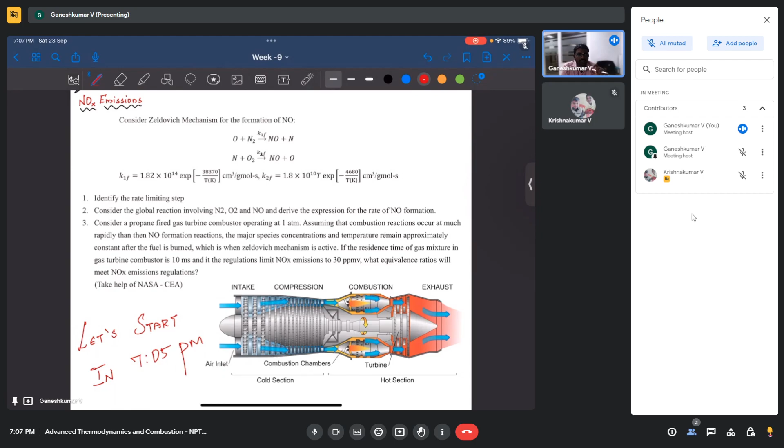Instead, we are going to focus on something which has a practical application using chemical kinetics. So what I have today is, I am going to talk about something called NOx emissions, which is very much crucial if you are operating a gas turbine engine, or in the sense, rocket engines or aircraft engines.

Because aircraft fly at high altitudes, they should not emit certain gases which are harmful to the environment, and if they do emit them, it leads to global warming. So basically, if it releases greenhouse gases, it will lead to global warming. The main gases which constitute global warming at that altitude include carbon dioxide, carbon monoxide, and NOx, nitrogen oxides. In addition, there is ozone also, which contributes to global warming.

But these are the main gases which contribute to global warming, and there are certain limitations, certain regulations set by the aircraft authority. They say that if I'm using such engines, then my emissions should be only a certain amount — above that, it is not allowed. So there are certain allowable emission norms which you should follow in order to operate such aircraft engines.

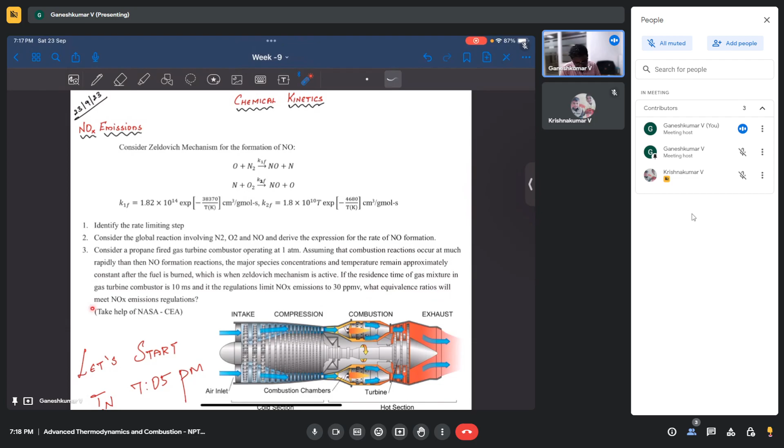If the residence time of the gas mixture in the gas turbine is 10 milliseconds, and if the regulation limits NOx emissions to be 30 ppm by volume, which means parts per million by volume, what equivalence ratio will meet the NOx emission regulations?

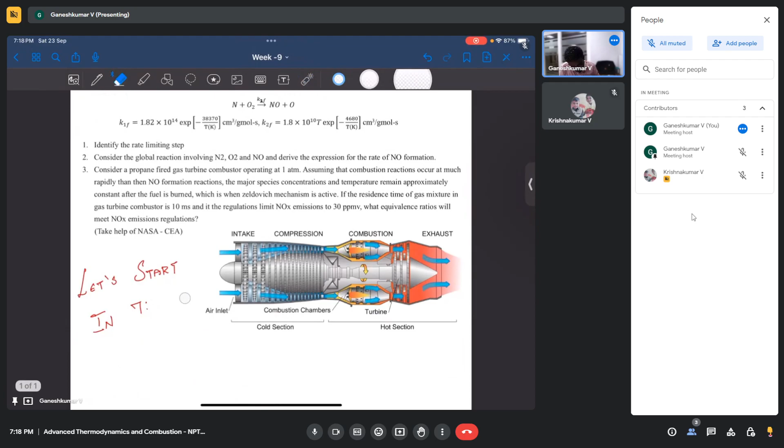So what I'm telling is, you have a gas turbine here.

Here we have a gas turbine and air is coming in. It goes through a series of compression in the compressor, then combustion in the combustor, then it expands in the turbine, and finally goes out through the nozzle. So the time it requires to go through all these things is just 10 milliseconds.

So residence time of gas mixture in the gas turbine combustor - just the combustor. Let's say this is T1 and the time it goes out is T2. This T2 minus T1 is actually equal to 10 milliseconds. So this is the amount of time the gas mixture will stay inside the combustor, after which it goes out of the combustor.

So that is one of the, it's not an assumption, it's like one of the crude calculations you can make, because you will be taking in air at very high speed, right? So you will probably run your engine at Mach 0.8 or 0.9.

So if the aircraft will usually move at Mach 0.8, which is around 280 meters per second or something - 280, or let's say 250 meters per second.

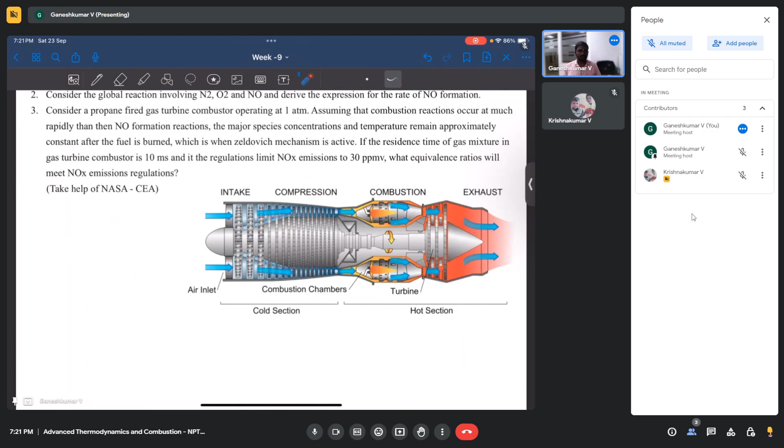The actual fuel air ratio divided by the stoichiometric fuel air ratio - that is the equivalence ratio. With which equivalence ratio you have to run your engine in order to meet this NOx emission is what we are going to find.

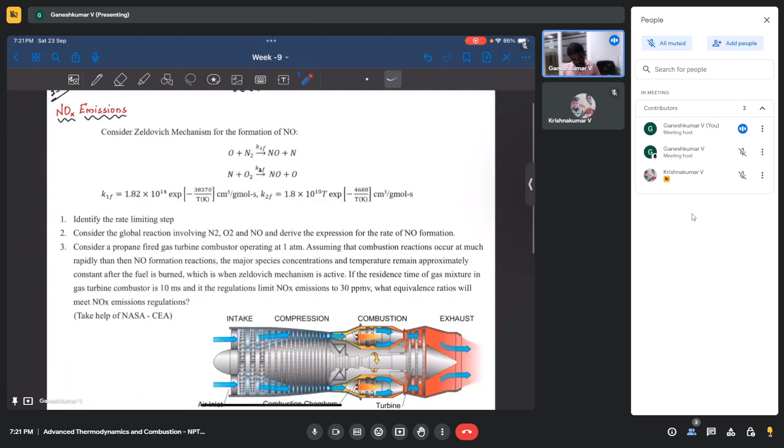Okay, so provided that the problem statement is clear, first let's try to identify the rate limiting step, because that is important and all your calculation is going to depend only on that rate limiting step. Rate limiting step, in the sense, is the main step which is going to take much of the time. If this step doesn't happen, the other subsequent steps will not happen.

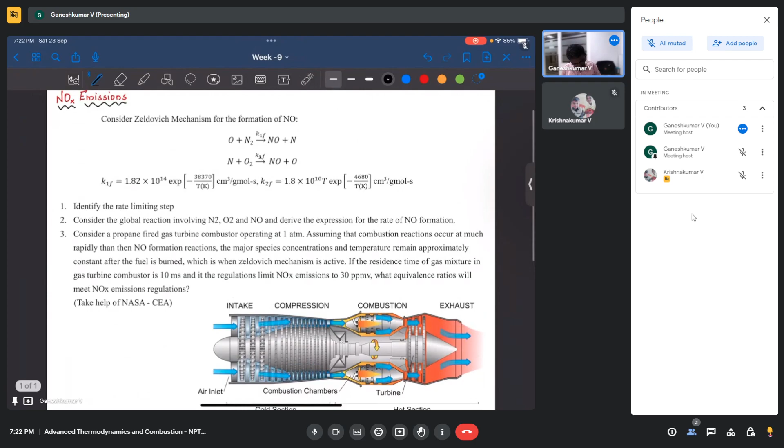The other subsequent steps are very fast, and you can assume that once something is formed, it will automatically get consumed. So that kind of step is the other step. The step which takes longer time, the step which is more important, is what we call the rate limiting step. So now we have two steps - let's try to find that out. Let me write it down separately here.

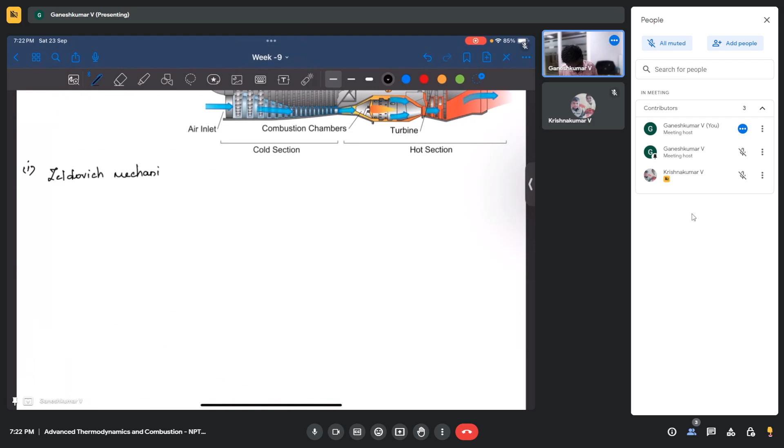So first we have the Zeldovich mechanism, and we have...

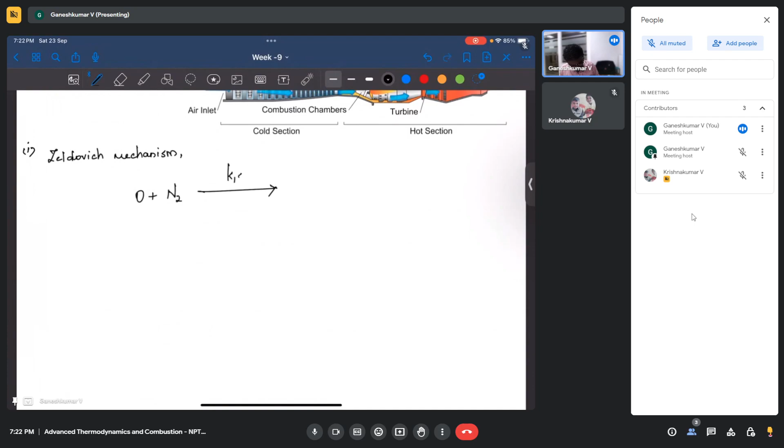K1F, NO plus N - that's the first step. The second step is, I guess, N plus O2, K2F, NO plus O. So this is the first step, and this is the second step.

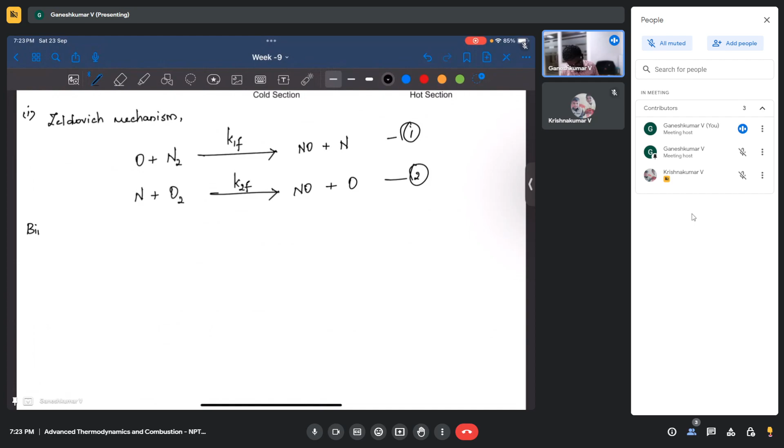So now we need to find which one is rate limiting. To find that out, we need to understand what is the time required for NO to form through step 1, and what is the time required for NO to form through step 2. We can get an easy estimate by finding the characteristic time scales. So all these are bimolecular reactions, and we already know what is the characteristic time scale of a bimolecular reaction.

So we know that tau chemical, for a bimolecular reaction, is going to be ln of E plus 1 minus E, in A, concentration of A by concentration of B, whole divided by K of that reaction, for a bimolecular reaction, times B of 0 minus A of 0.

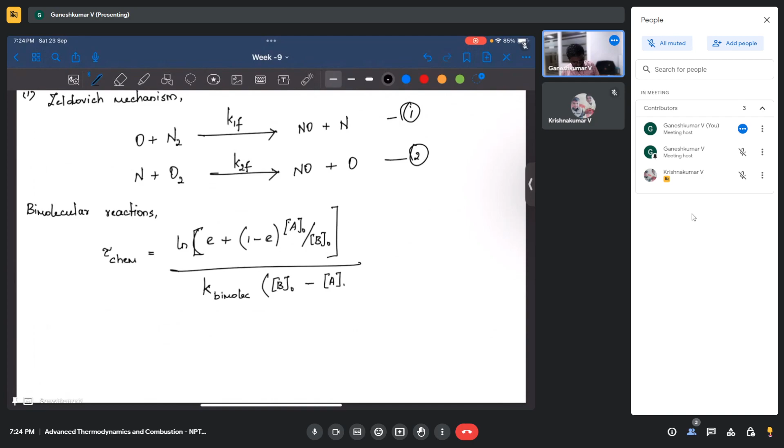Now we also know that if concentration of B is very high compared to A. So this is basically what I'm trying to say: A plus B gives C plus D.

For this reaction, what is the chemical time scale is what we are finding. If the concentration of B is larger compared to A, which is usually the case in our mechanism also - concentration of N2 is only going to form, O2 is going to form, and that is going to react to form NO. So initially we have N2 and O2 as major compounds. In air also, N2 and O2 are the major constituents of the gas mixture, while O and N are very less in concentration.

So we can say that for our case also this is true. If that is the case, this tau chemical reduces to simply 1 divided by K bimolecular.

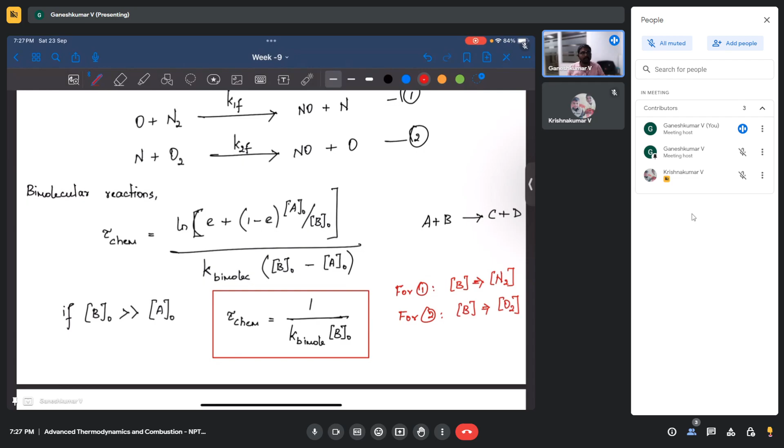So what is the easiest way for NO to form is what we are finding, or what is the toughest way. So let's find for reaction one.

For reaction 1, let's say I denote it as tau C1, which is going to be 1 divided by K1F, the forward reaction, times the concentration of N2. So this is the characteristic time scale for the first reaction.

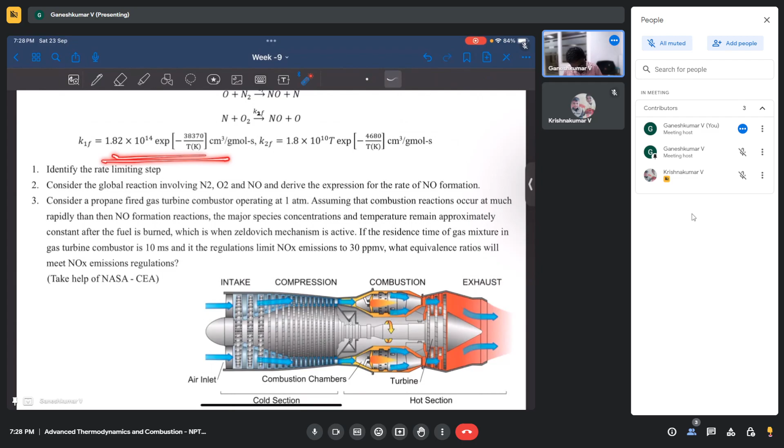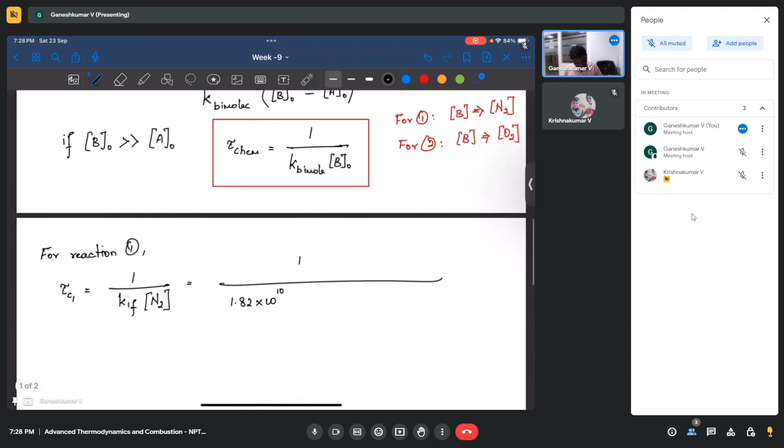And it's also given that K1F is this big expression, so let's substitute that here: 1 divided by 1.82 into 10 power 14 into exponential of minus 38370 by T. So it's going to depend on temperature also, and we have concentration of N2.

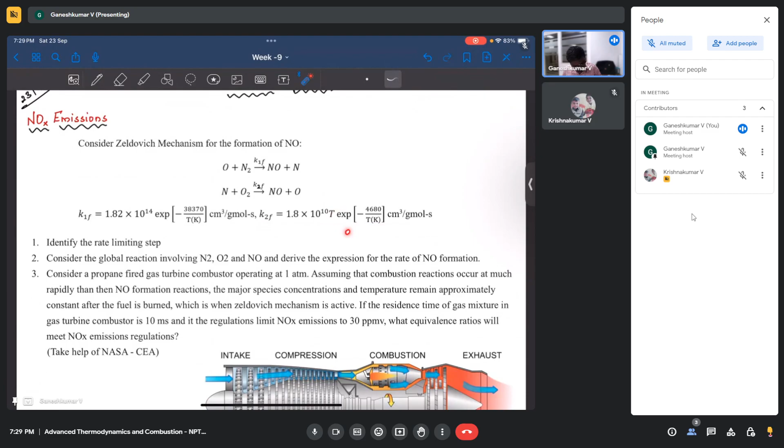Now let's write for reaction 2 also. So tau C2 is going to be 1 divided by K2F times concentration of O2, which you can similarly write as 1.8 into 10 power 10, exponential of minus 4680 by T, times the concentration of O2.

Please remember this is in centimeter cube per gram mole second, centimeter cube per second, which means concentration also you may need to substitute in terms of gram mole.

How do you substitute concentration? It is going to be per unit - gram mole per centimeter cube. So concentration in terms of volume is going to be moles per centimeter cube. So this should be substituted in moles per centimeter cube, please remember that.

You will get 1 divided by second - the time scale is in terms of seconds. So the whole thing will be in terms of seconds.

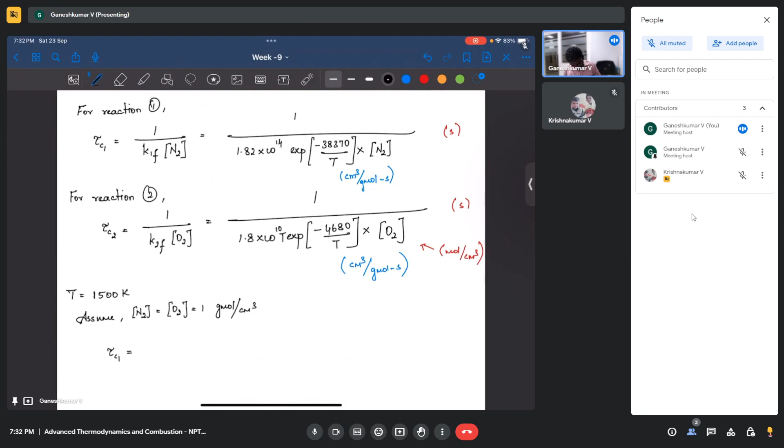Now let's say if I substitute it, let me find out an order of magnitude for tau C1. Let's say if I substitute it in here, calculate it. So I have 1500 Kelvin, so 38370 divided by 1500, exponential minus, 1.82 into 10 power 14, and 1 divided by answer. So tau C1 is coming out to be 7.066 into 10 power minus 4 seconds.

So from here what you can find is, this is for just an arbitrary case, right? So even if N2 and O2 have very large differences, let's say even if N2 is 1 and O2 is 1000, or if N2 is 1000 and O2 is 1, even if that is the case, it is more likely that tau C1 is always going to be greater than tau C2. The reason is by how many orders different in magnitude.

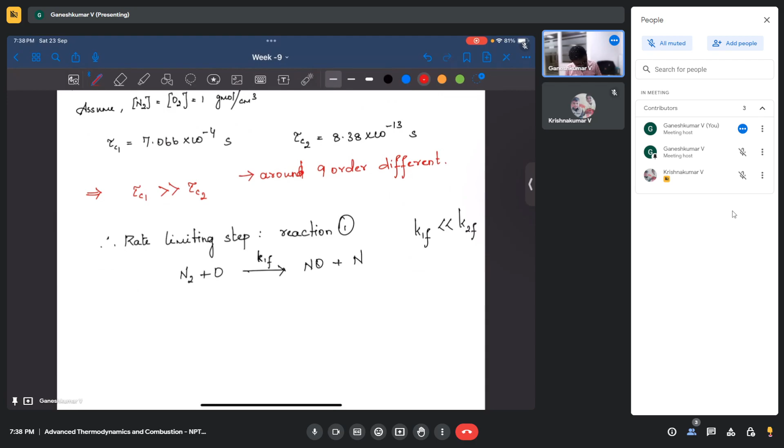Let's look at question 2. What is the next step? You need to consider a global reaction and find the rate of NO formation. Now it's a real challenge. We just found out that this reaction is responsible for NO formation, so this is the main reaction responsible for it. Now we are going to quantify the amount of NO formation. So for that, let's write a global reaction.

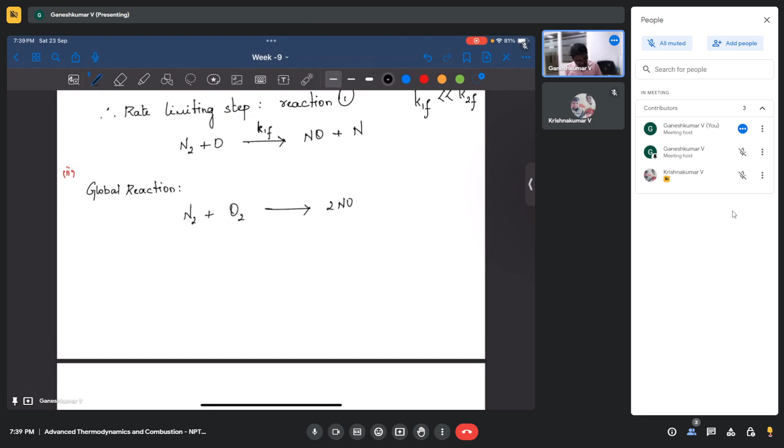I'm sure you must have seen it in the lectures. It's going to be just N2 plus O2. This can be the algebraic sum of those two reactions in the reaction mechanism, and this is going to happen at some rate kg.

Now let's say if I want to find the rate at which NO is formed, which you can write as d by dt of NO concentration, it is nothing but kg times the reactants times the product, and this concentration will have some factor in the power. But that power doesn't actually follow the stoichiometric coefficient. So this is not 1 and 1, because for a global reaction the order is not equivalent to the stoichiometric coefficient, but in a reaction mechanism you can simply write the stoichiometric coefficient.

In a reaction mechanism, meaning in each and every elementary reaction, you can do that, but in a global reaction you should not, because in reality N2 is not going to just collide with O2 and form 2NO directly. That is not going to happen; it happens through a series of elementary reactions. So for elementary reactions, when you write the rate at which each species varies, you can write these stoichiometric coefficients, but in global reactions you should not write that.

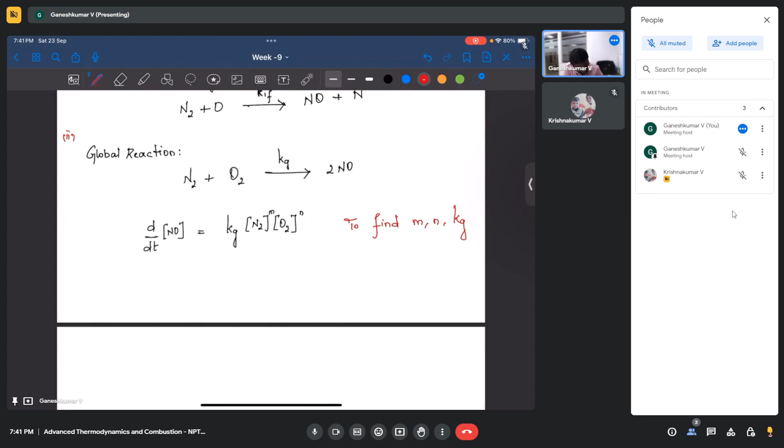Now we need to find m, n, and kg. Once we find these three, we can simply find d by dt of NO. So let me write that down. Now, to find m, n, and kg, how do we do it? That is going to come from our knowledge of the Zeldovich mechanism. Let's try to do that.

So reaction one: what is reaction one? It's going to be O plus N2 gives NO plus N. This is reaction one.

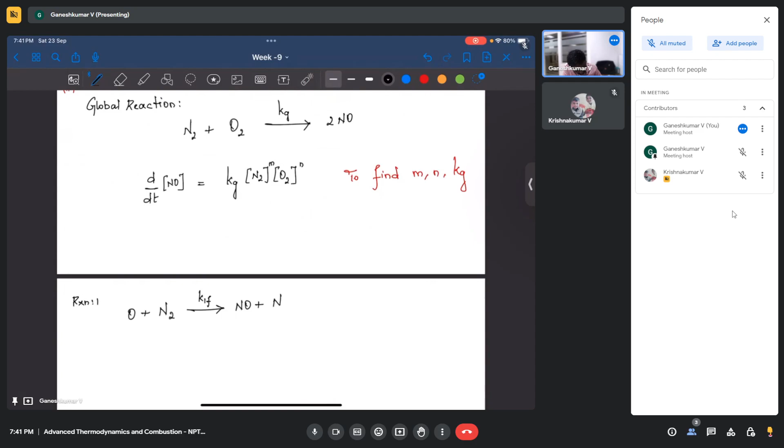So let's say if I write dNO by dt for this, what it's going to depend on is K1F, concentration of N2 to power 1, and concentration of O to power 1. So that is true.

But it's not just reaction 1. NO is formed through reaction 2 also, which is N plus O2 with rate K2, giving NO plus O.

So before we wrote for a global reaction. For this, let's say if I write the formation of NO, we will get K1F times N2 concentration times O concentration, from the first reaction, plus K2F times N concentration times O2 concentration. So this is the contribution from the first reaction, and this is the contribution from the second reaction.

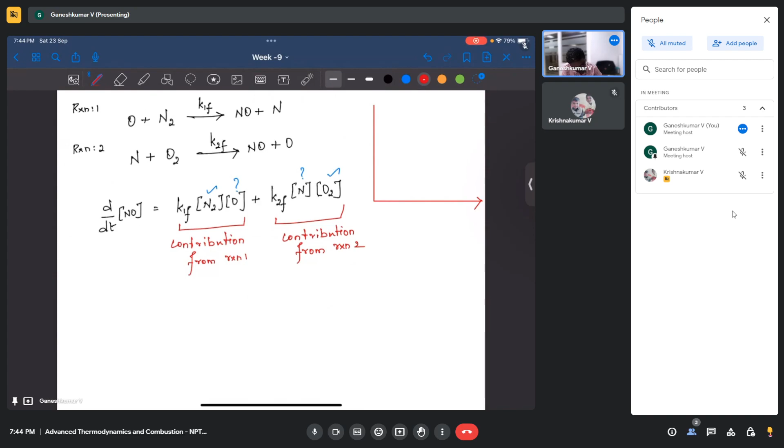Okay, so maybe before doing that, let's intuitively try to understand how the concentration varies with respect to time. So this is time, and this is concentration, concentration of any species. Let me write it down like this.

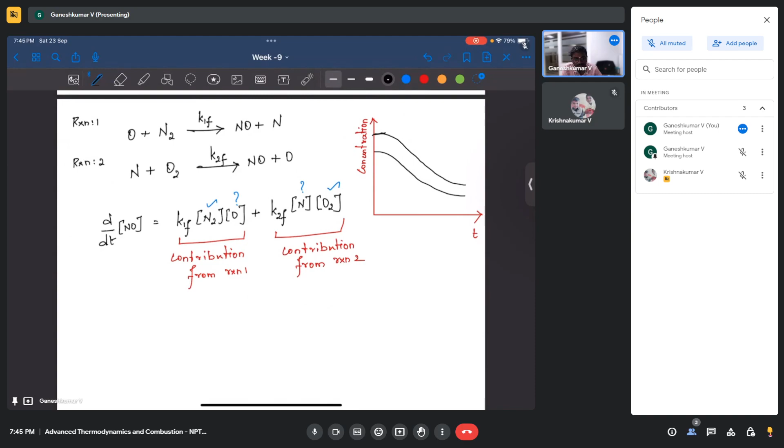Now let's say for N2, initially it will be at a certain concentration, and as time goes, N2 gets consumed and forms NO, so N2 concentration reduces. Similarly O2 is also at some initial level and it also reduces over time. That's fine for NO formation, so this is N2, this is O2.

Now let's draw for NO. Initially it will be zero because it's not present, and as N2 and O2 get consumed, NO goes higher and higher, increasing until it eventually reaches a steady state or something. So this is going to be NO.

Now how about N and O? So here we have N. If initially, from the first reaction, N2 collides with O and forms N. So as soon as N forms, it gets consumed in the second reaction, because that reaction is very fast, in femtoseconds.

So as soon as N forms, it gets consumed by the second reaction. What happens is there's a slight increase, and then it remains almost constant throughout, and at the end it may go to zero once all the reactions have happened. So this is the time evolution profile for N, through some initiation reaction that slightly increases its concentration, but since the second reaction happens simultaneously and is very fast, N keeps getting consumed easily, so its concentration doesn't change much throughout the mechanism.

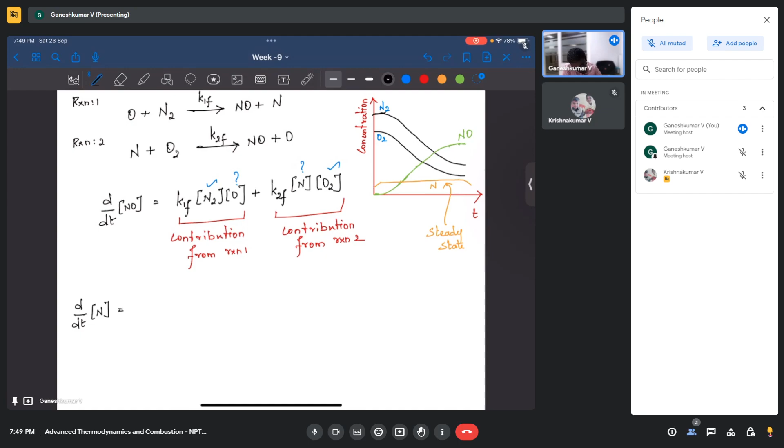So if that's the case, this almost reaches steady state—the concentration has reached steady state, so it's not changing anymore. Given that, let's write a rate law for N, for the formation of N. From the first reaction, it generates N, so that term is positive: K1F times N2 and O.

Through the second reaction, N is getting consumed, so there's a negative term: K2F times N and O2. And since we established it's at steady state, this is going to equal zero—we're applying the steady state approximation for species N. This is an approximation to remove the dependence on N; otherwise you won't be able to come up with a good estimate for the formation of N. This is the steady state approximation of the concentration of N.

So let's rearrange this: K1F times N2 concentration times O concentration equals K2F times N concentration times O2 concentration. We're interested in finding the concentration of N, so let's rearrange in terms of N. N is going to be equal to K1F times N2 times O divided by K2F times O2.

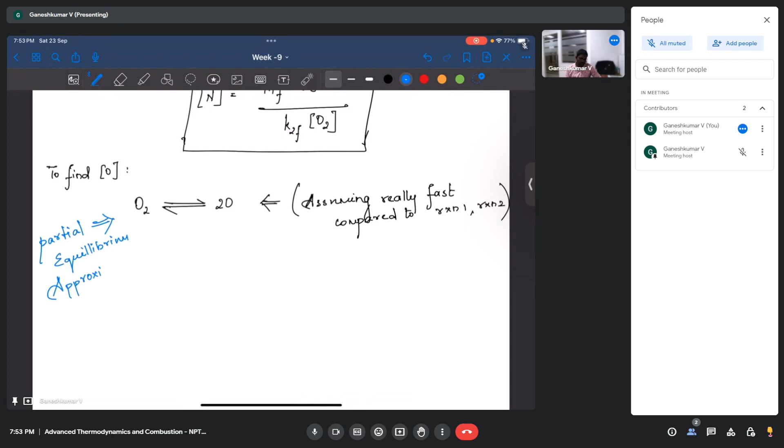So what you can do is say that this reaction is at partial equilibrium. That is another approximation that we learnt in the lecture. This is a partial equilibrium approximation, and this approximation is for a reaction. Remember, steady state approximation is for a species, while partial equilibrium approximation is for a reaction which is really fast compared to the other reactions.

So if this is the case, then if I want to write an equilibrium constant for this reaction, it's going to be simply P of O, the partial pressure of oxygen atom, divided by P naught, whole squared. This is the product divided by P of O2 by P naught, where P naught is the standard pressure.

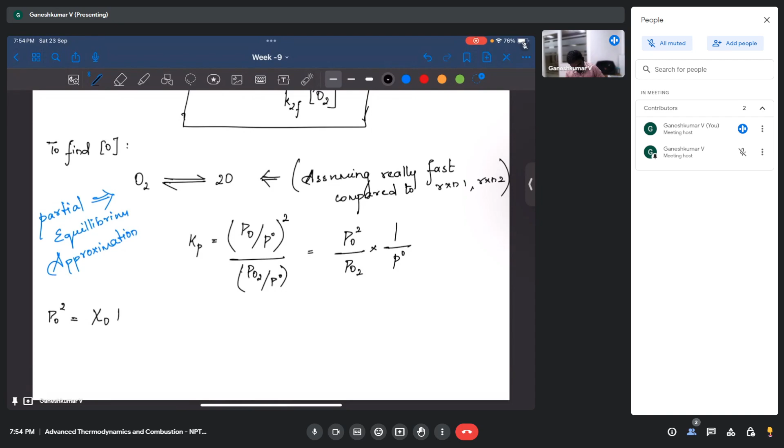And I can also rewrite it in terms of mole fraction. Let's say P of O is nothing but mole fraction of oxygen atom, which I denote as X, times the pressure, whole squared. And P of O2 is going to be mole fraction of O2 times the pressure.

So if I substitute it here, Kp is going to be mole fraction of O square divided by mole fraction of O2, times P divided by P naught. Since P is equal to 1 atm, which is also equal to P naught, we can cancel this, and write Kp as x of O square divided by x of O2.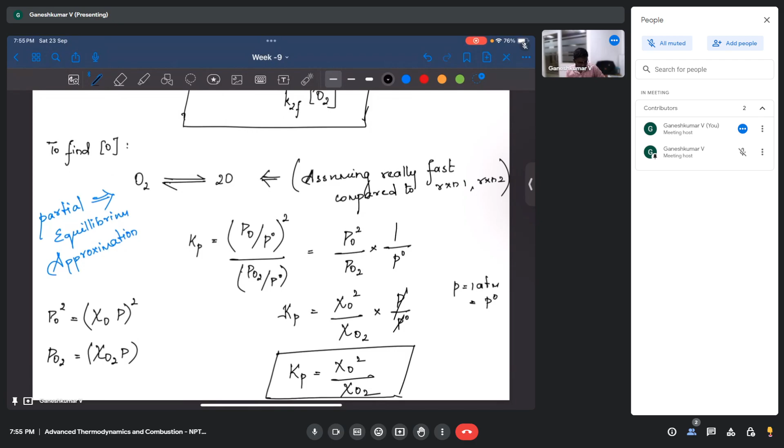And what we also know is, how do you find Kp? Kp is going to be simply exponential of minus delta G naught for that reaction divided by RT. We discussed this in the last session also.

So how do you find delta G naught? Delta G naught is going to be 2 times G of formation of O minus G of formation of O2. Since O2 is a naturally occurring element at 1 atmosphere, this is going to be equal to 0. So this becomes simply 2 times G of formation of O, and RT in terms of temperature, so we need to find temperature in order to do that.

So finally we are interested in concentration of O, in terms of mole fraction. The mole fraction of O is going to be equal to mole fraction of O2 times Kp, whole to the power 1 by 2.

Okay, so this is how it's going to be depending on. Let's say if I want to write in terms of concentration, then we know that P of O is going to be concentration of O times RUT. So if you relate it to that, X of O times P is equal to concentration of O times RUT. So X of O is nothing but concentration of O times RUT by P. Same with X of O2, it's going to be concentration of O2 times RUT by P. P is the pressure of the mixture.

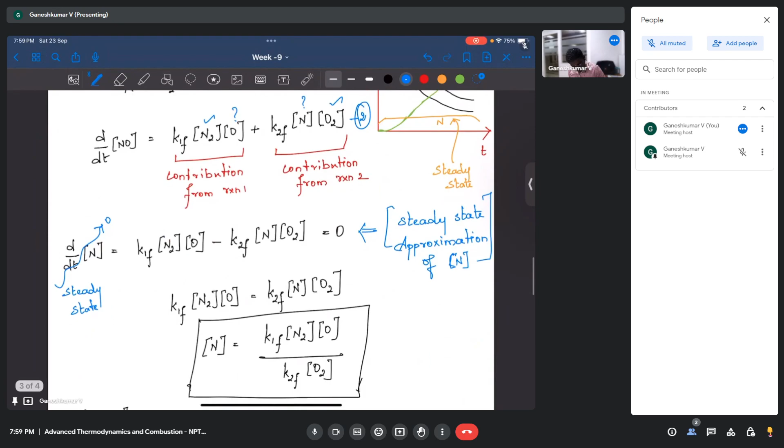So that's it. We found the concentration of O, we found the concentration of N. To find concentration of N, we use steady state approximation. To find concentration of O, we used partial equilibrium approximation. And now it should be easier to substitute in this equation. Let me put some equation numbers. This is equation 1, and this is equation 2. Now let's substitute N and O into equation 2.

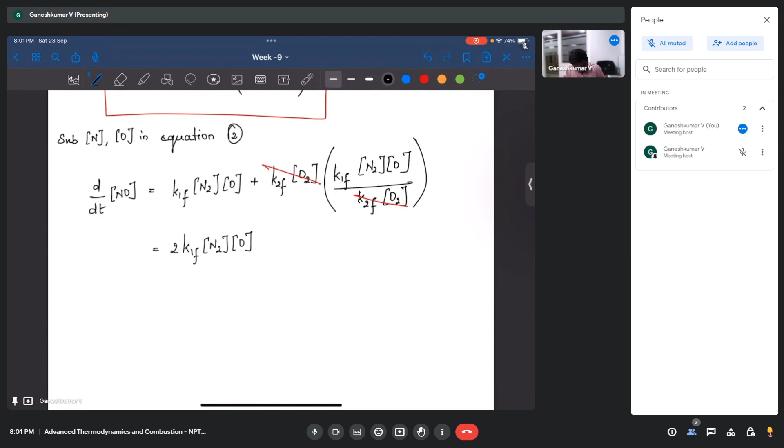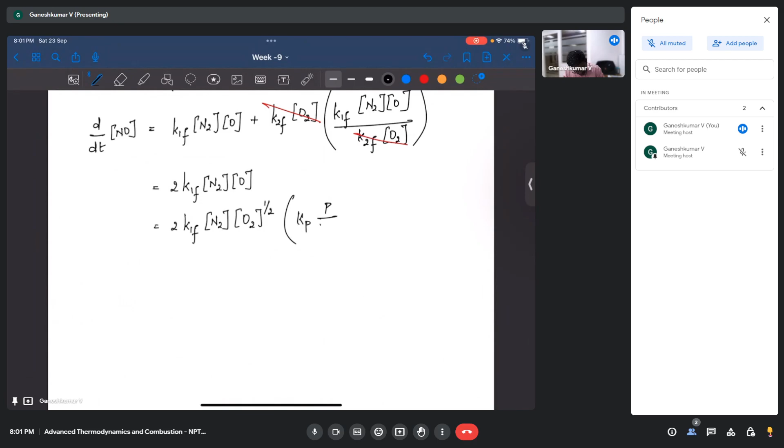Substitute O concentration here. O concentration is going to be equal to 2 times K1F into N2 concentration times O2 concentration power half, times Kp into P by RUT whole power half. Clear, right? So this is d by dt of NO. Let me rewrite this again: d by dt of NO is going to be equal to 2 times K1F into Kp into P by RUT whole power half, into N2 concentration power 1 and O2 concentration power half.

And we also know from the global reaction, which is equation 1, that d by dt of NO is simply Kg into N2 concentration power M and O2 concentration power N. So if this is the case, you can simply correlate these two to get Kg. Kg is going to be simply 2 times K1F times Kp, P by RUT whole power half. And M is going to be equal to 1, and N is going to be equal to half.

As I said, M and N will no more be integers, and the order of this reaction is going to be 1.5, which is M plus N. So your formation of NO is going to depend on N2 concentration, formation of NO is going to depend on O2 concentration, and it is going to depend on temperature to the root. It's going to depend on K1F also. So these are the parameters - if you control them, you'll be able to properly limit your NO formation.

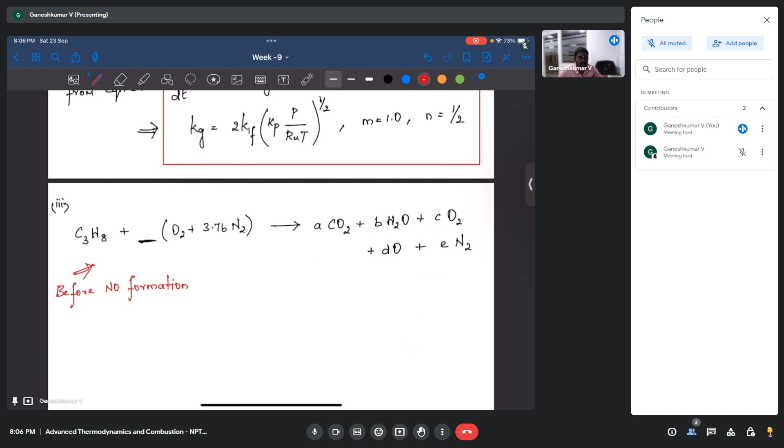Because NO formation requires N2 and O2, and now it is there—N2 and O2 is there. So we need to find out this factor. This factor is going to be, we already know, if it's stoichiometric, this is going to be x plus y by 4 for any hydrocarbon, CxHy. So for a given equivalence ratio, this is factor A.

Let's say, let's write it as Z. So this Z is going to be simply x plus y by 4, divided by the equivalence ratio, which for us is going to be 3 plus 8 by 4, divided by phi. You can actually do a separate calculation—no need to exactly follow this method. This is how you find out for any hydrocarbon. If you do the proper calculation itself, you will end up getting this, so you will have 5 by phi. So it's nothing but Z is equal to 5 by phi.

So let me rewrite it here: it is going to be 5 by phi. So let's say if I have an equivalence ratio of 1, okay, stoichiometry—if it is stoichiometry, the coefficient is going to be x plus y by 4, which is 5. So that is going to be there. If I have a higher equivalence ratio, then I have lesser oxidizer than required, so this whole thing will be lesser. If I have a lower equivalence ratio, less than 1, which means fuel lean condition, which means more oxidizer—so if I have phi to be less than 1, this 5 by phi is going to be more than 5. So that is fine. Now we found out.

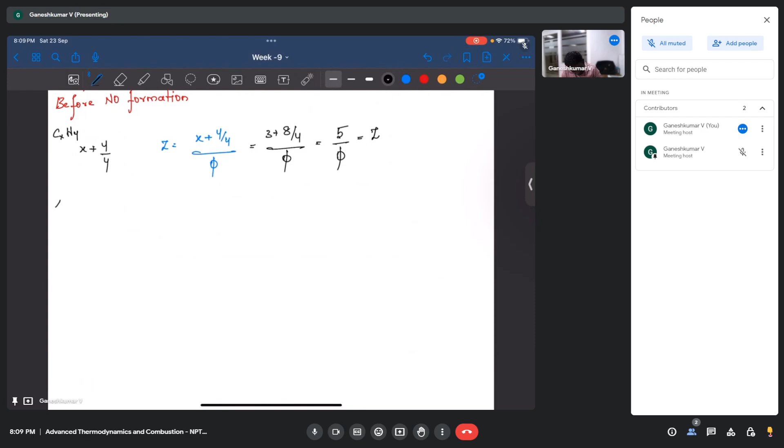Let's try to find out how much NO is built up. So what they have said is the residence time of the gas mixture is given. So let's say the residence time is tau residence—it is given. So we need to understand how much NO is formed during that residence time. That will give us the idea, because after the combustor, your temperature is going to keep decreasing, and as temperature decreases, the Zeldovich mechanism is not going to happen—NO is not going to form. So the only place where NO can form is at high temperature, and the high temperature is only present in the combustor. So if we get a good estimate about NO formation within the combustor, that is most probably going to be at the exit of the engine.

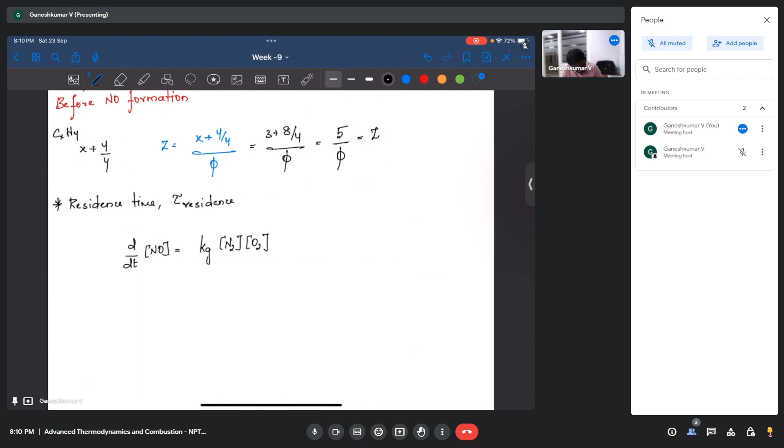So we already found out that the concentration d by dt of NO is nothing but kg times N2 times O2 to the power 1 by 2. This is what we found. So now what we will do is we will integrate it for a time. This is a time derivative, so we can take the side and integrate it for residence time—times dt. So we will integrate from 0 to tau residence.

Similarly, we will integrate this from 0 to some formation which we need. Let me write NO dash. This is the NO concentration which will be at the end of the combustor. Now let's integrate it, NO dash.

Now Kg, N2, O2, all this can depend on time. Kg depends only on temperature, and the temperature is not going to change much over time. The adiabatic flame temperature is reached, or slightly less than it, but more or less the combustor stays at the same high temperature. So temperature is not a function of time, and we can take Kg to be constant. N2 and O2 will be present since combustion is happening.

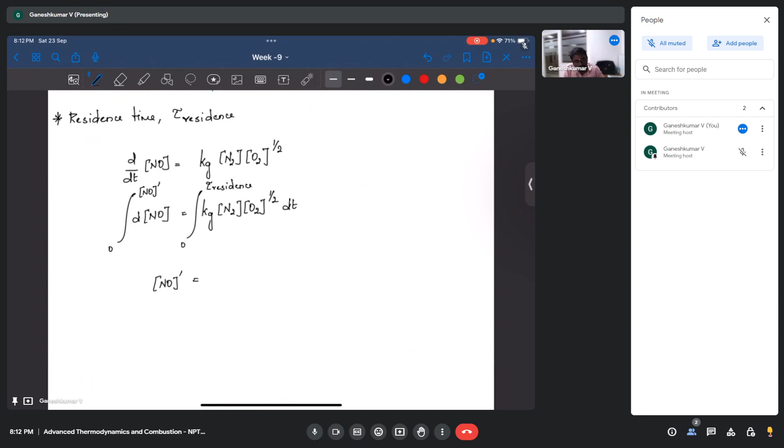The formation of NO is in parts per million, which is very small compared to the N2 and O2 concentration. So the change in N2 and O2 due to NO formation is very small, and we can assume their concentrations are constant. With this assumption, we can arrive at an upper estimate to find the right answer. At the end of the class, I'll also tell you what they really do nowadays.

So we are doing a lot of approximations here, and each approximation can lead to different results. How nowadays people find this out without doing these approximations, we will discuss at the end of the class. But before that, this is how your NO formation is going to look like.

What we need to do is find tau residual, which we know, sorry, not residual, it's residence time. Tau residence is nothing but NO dash. So to find NO dash, which is actually NO at time t equal to tau residence, both are the same.

To find NO, we need the value of Kg, which is a function of temperature. So we need temperature, we need N2 concentration, we need O2 concentration. These are the only things it's going to depend on.

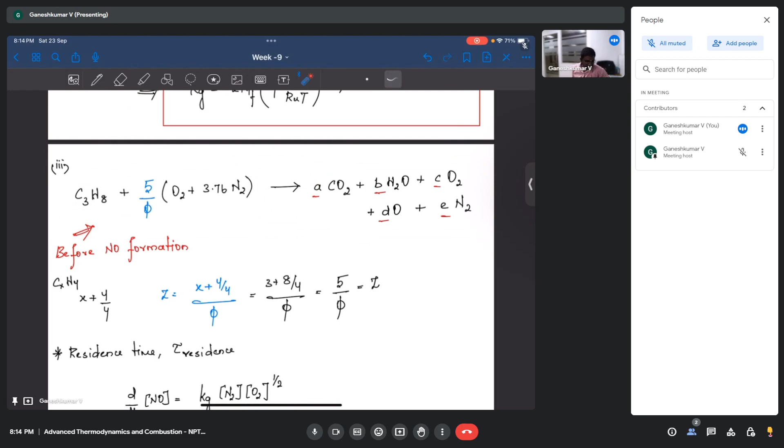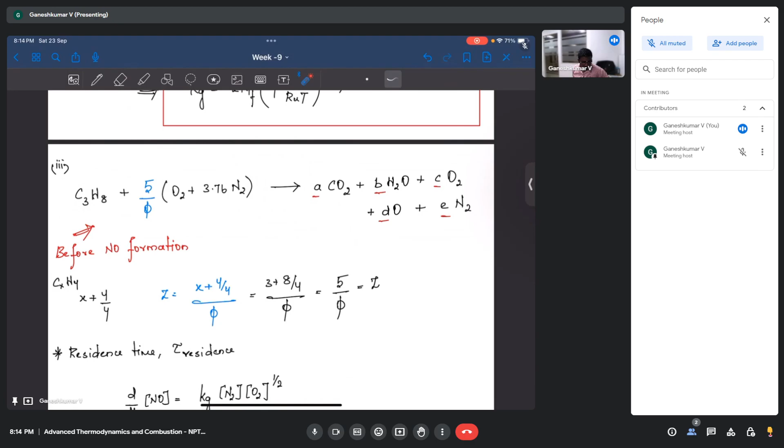You can find the adiabatic flame temperature by equating the enthalpy of the reactants to the enthalpy of the products, and the temperature it reaches is what we will use here. Similarly, we need to find N2 and O2. That is why we are going to take help of NASA CEA to find this out.

We already discussed how to use NASA CEA in the last class. If you missed it, please go through the recordings available. I will show you the demo today as well, so no need to worry.

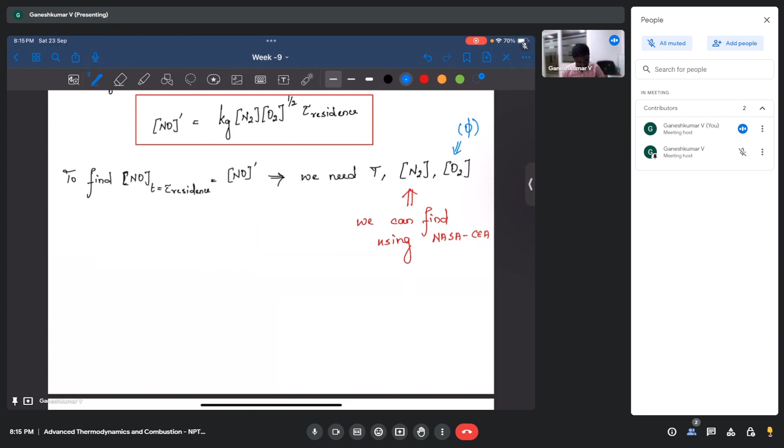We need to use NASA CEA for this, and all these values are going to be a function of the equivalence ratio. For a different equivalence ratio, these are also going to change. For convenience, let's rewrite this equation, let's call this equation 3.

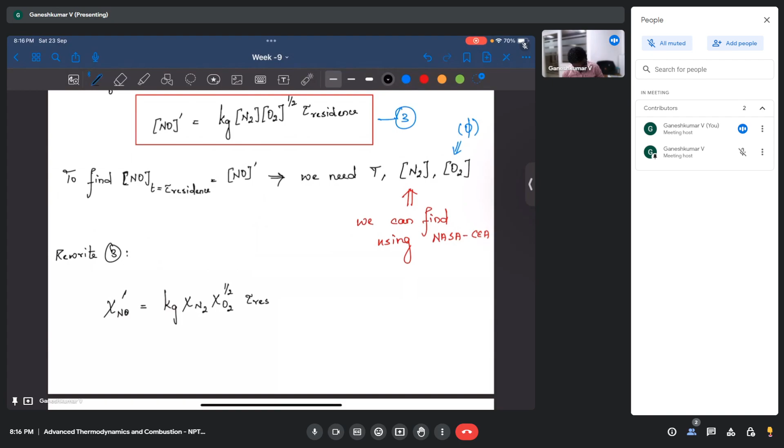Let's rewrite equation 3 in terms of mole fraction, because NASA CEA will give us mole fraction, so we can directly substitute it. So you can write it as x of NO dash, going to be Kg times x of N2, x of O2 to the power of half, times tau residence, times the square root of P by RUT.

Basically you need to multiply by P by RUT for N2. So this is nothing but x of N2, which is equivalent, and then x of O2 into P by RUT to the power of... So this and this get cancelled, and only this P by RUT will be additionally present in this equation. So that is what we have here.

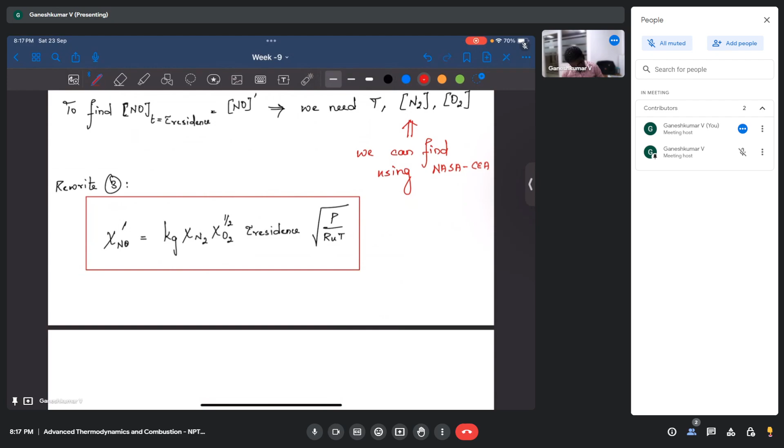And the mole fractions can simply get converted into parts per million by volume. That is the reason it is convenient to use this setup.

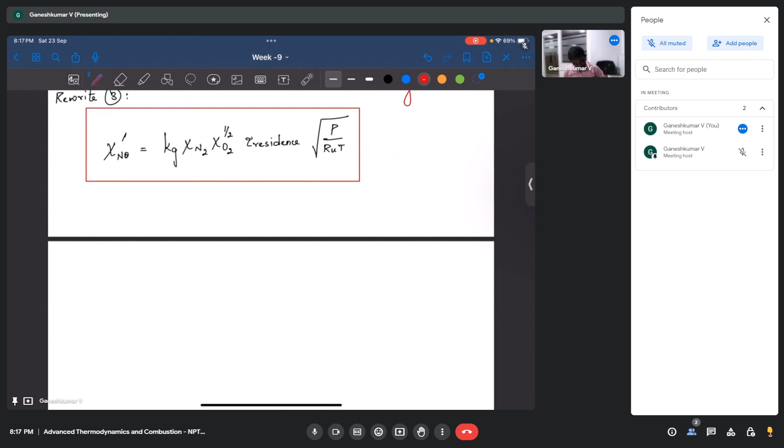So now we have to choose an equivalence ratio for which the NOx emission will be less. For that we need to find which equivalence ratio works, for each and every equivalence ratio we need to find. Let's put a table, we will draw a table here.

So for an equivalence ratio, we will find the mole fraction of N2, fraction of O2. This is based on equilibrium. And then we will also find mole fraction of NO dash from the Zeldovich mechanism, right?

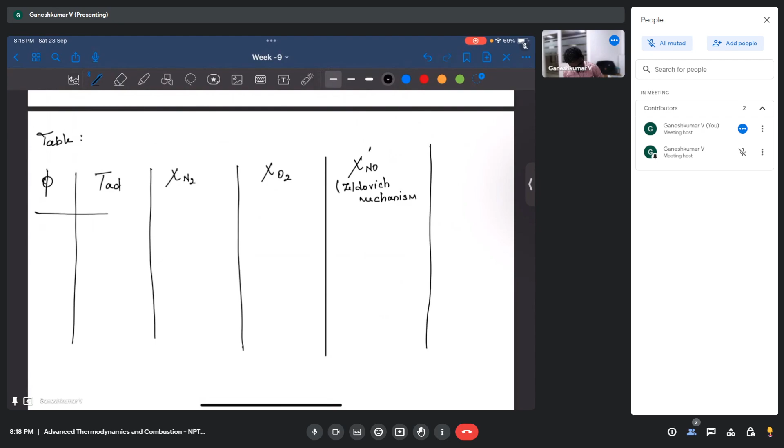In between we need to find the flame temperature also, right? So phi, T adiabatic, and then Zeldovich mechanism. So this is going to tell us which phi we need to choose.

So how can we write this? Let's say we will change our phi from 0.5, 0.8, let's say till here. Let's see whether this is going to tell us or not. So let's run our simulation, let's run NASA CEA to find T adiabatic, X N2 and O2.

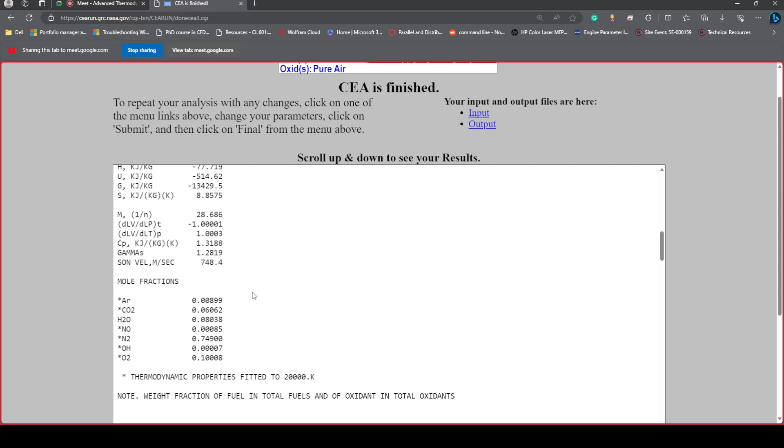So we need to have only CO2, H2O, O2, O and N2. So maybe you can take this as an approximation, but let's try different. Let's see if we can omit those additional species. Select species, omit only and insert. So I have a lot of species here. Let's say if I omit H, I omit H2, I omit what's the other one?

O2 I will keep, O I will keep, because those two I require, and NO2, NO3 for now we will omit it, OH also we will omit it. And NO also we will omit it because we are going to find NO, how much NO. So let's perform the analysis, let's see whether it works. Okay, it worked.

So here we have only argon, CO2, H2O, N2 and O2, which is good, so these are the only mole fractions present. So basically what we did was we tried to consider only CO2, H2O, N2 and O2, in addition O also, but it looks like it is very less, so we omitted it. We are going to consider only these species, so we tweaked the program to perform the equilibrium calculation only for those species. So it is the same as calculating myself using a separate program, so NASA CEA is giving the same results.

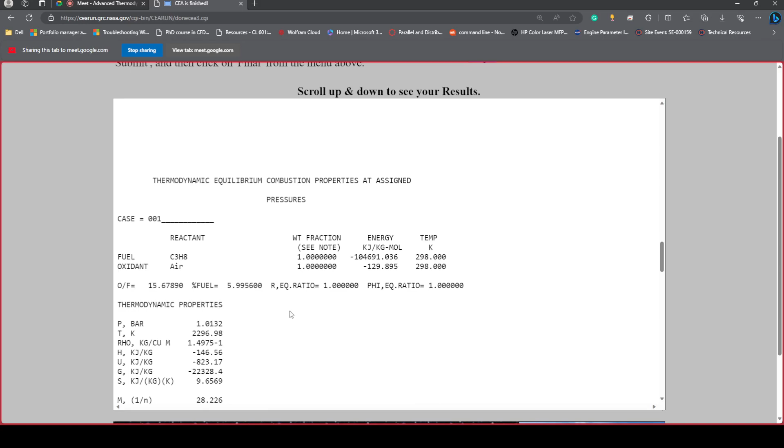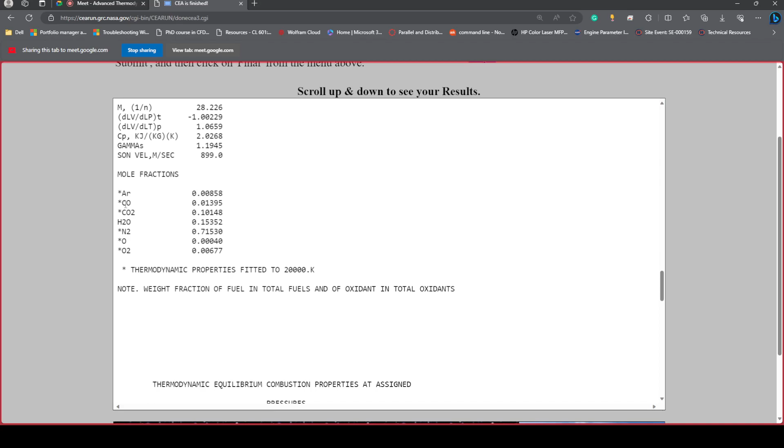Okay, let's go down. Then we have 2296 Kelvin at equivalence ratio of 1. For that we have N2 is 0.715, and O2 is 0.0067. Or you can simply write 0.007, that is also fine. We're also seeing additional species because we didn't omit CO, so it is coming there, but we need not worry about it.

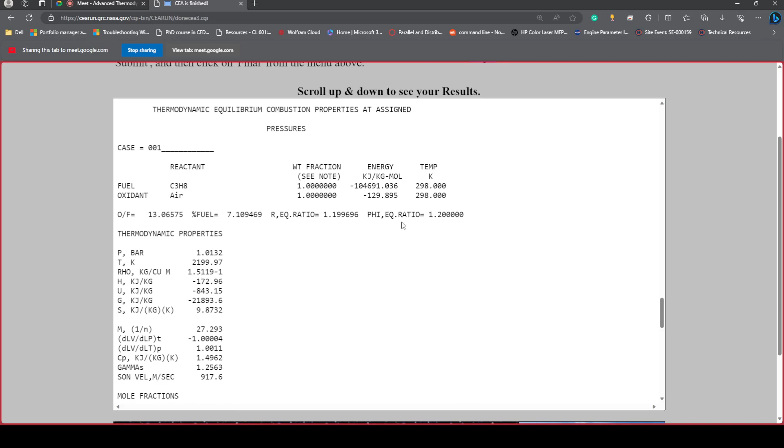And now we have equivalence ratio of 1.2. For 1.2 we have 2200 Kelvin. You can see that the maximum reached around equivalence ratio of 1. Actually it will reach close to 1, it will not be exactly 1. So whether in fuel lean or fuel rich, the flame temperature is going to be less than that of the stoichiometric mixture.

So for 1.2, N2 is going to be 0.683468, and O2 is very less, 2 into 10 power minus 5, which is good. Now going down we have 1.5.

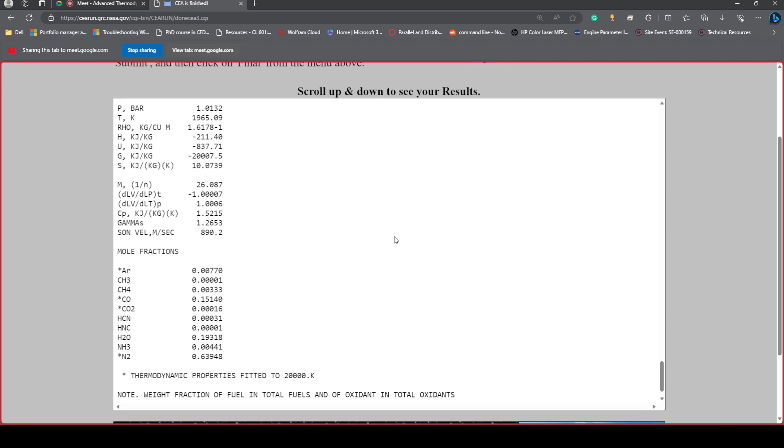For 1.5, N2 temperature is 1965 Kelvin, and N2 is 0.64, and O2 is gone, O2 is not present. Interesting, O2 is not present. So maybe we shouldn't use it. Let's ignore 1.5 and let's see for the four values.

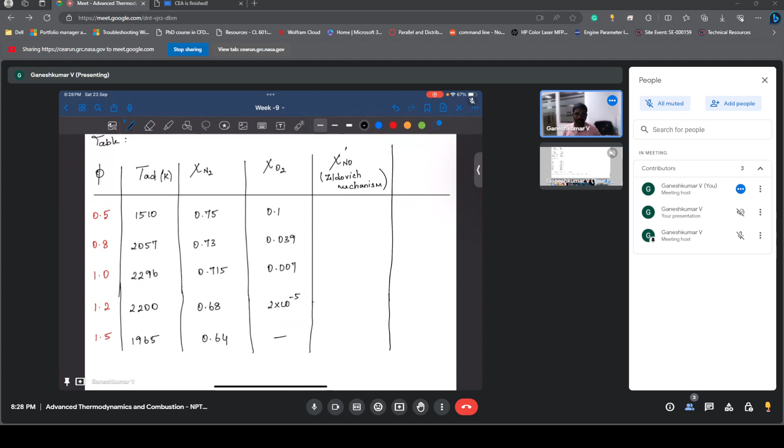Okay, so now I have to find... let me present it from here. I have written down all the things. So here I have written down all the values, N2 and O2 mole fractions, flame temperatures, and everything.

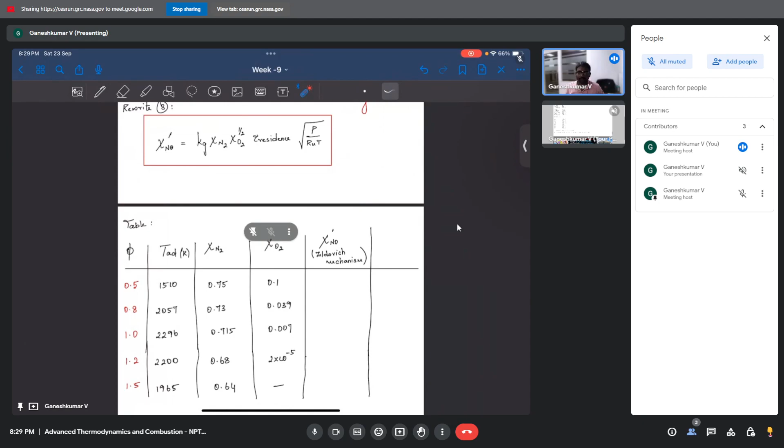Now we need to fill this column of NO dash. So what we could do is either do all the calculation by ourselves using this, but what I'm going to do is something different. What I will do is use MATLAB or something to calculate this.

So let me share that also. Share now, I will share the whole window now. I think I shared the whole window. So let's say if I go to this, you should be able to see it. So right, there is this, we have the command window. I think you all know how to do it, but let me just quickly calculate it here.

So what I found was I have 5 equivalence ratios, which is 0.5, 0.8, 1, 1.2, and 1.5. You can do this in your cells also. And then T adiabatic is actually 1510, 2057, 2296, 2200, 1965.

Okay, and x N2, this is the mole fraction of nitrogen, that is 0.75, 0.73, 0.715, 0.68, 0.64. Okay, and mole fraction of O2 is 0.1, 0.039, 0.007, and 2e minus 5.

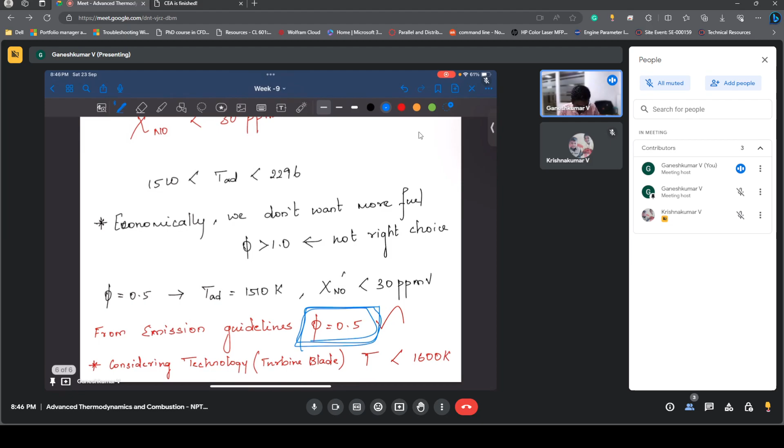So if you are motivated in that range, considering the technology of the turbine blade, at the present state of the art you cannot have a turbine blade above 1600 to 1800 Kelvin. So T should be less than, let's say, 1600 Kelvin. The ideal choice would be to go with an equivalence ratio of 0.5, because it is also economically efficient.

You're running your whole combustor in a lean mixture, and also you are meeting the turbine conditions, so you have to meet turbine conditions. This has a negative effect also: since you have less temperature, you are going to have less output, which means you are going to get less thrust from the engine, but you cannot do anything about it.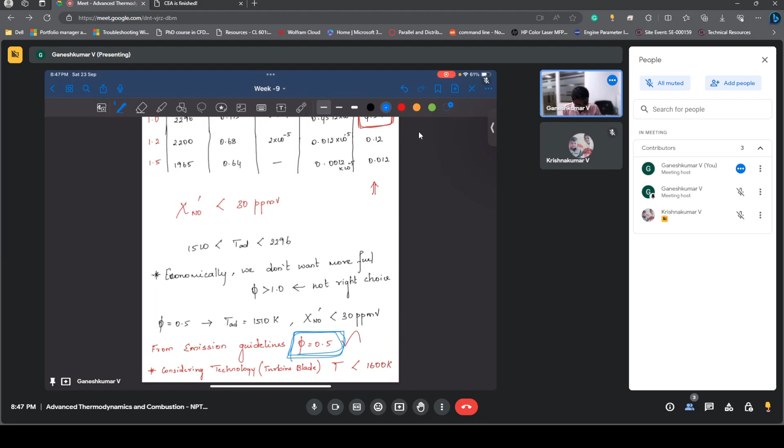So if you go above this, NOx emission gets violated, turbine blade temperature gets violated, and because of that, other problems will be created. Instead, it's better to go with lean conditions - economically efficient also, but performance wise it will get affected, that is true. So you may need to reconsider these calculations also.

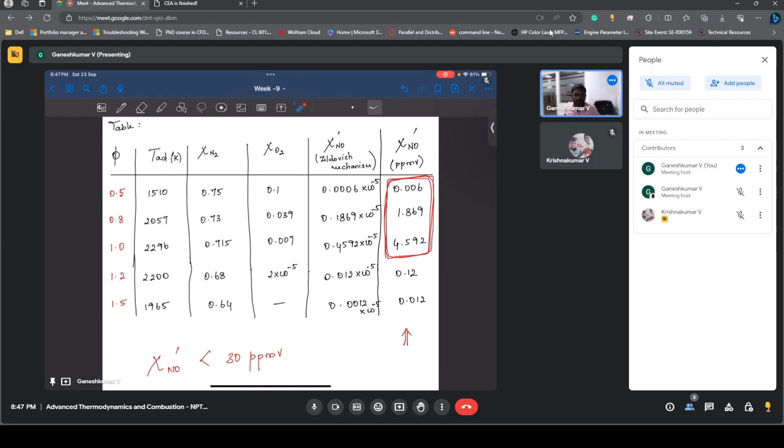All right. So that is how you find the NOx emission in any of the systems. You can even find the carbon monoxide, how much is it coming out, based on this kind of calculations.

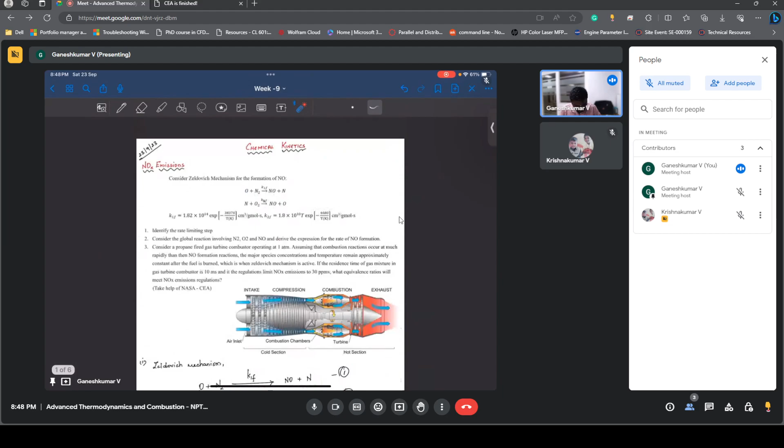But basically nowadays people don't need to use this steady state. We used steady state approximation, partial elimination, partial equilibrium approximation, and we ended up arriving at the NOx emissions. Nowadays people don't need to do that approximation.

People can do really high fidelity CFD calculations to find out what would be my temperature at the exit of the combustor, what would be the exact NOx emission or NOx formation, how much is it forming exactly - you can calculate it. To calculate it, you need to have a very good computational framework and also good computational resources. So basically, you need to model the whole combustion.

You need to model each and every reaction mechanism. You need to take care of mass, momentum, and energy conservation. And in addition to this, species mass conservation has to be taken care of.

Because each and every species is going to get involved, each and every species will get consumed, will get destructed, will get produced. So the species mass fraction equation and the production/destruction will be taken care of by the chemical source terms, which come from the mechanism, and mass and momentum conservation you need to take care of.

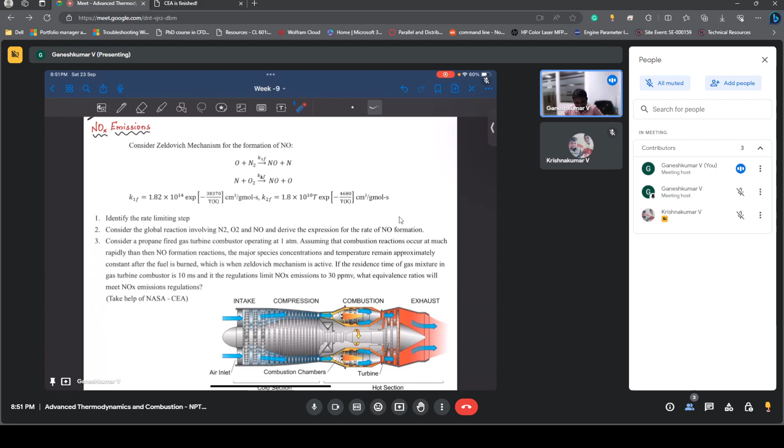So that is why I want to show you how we can, by simple hand calculation, without using such high fidelity CFD software, without using very high computing resources, come up with a good estimate by applying such a mechanism, by applying this way of doing things. So that is what I wanted to show you today.